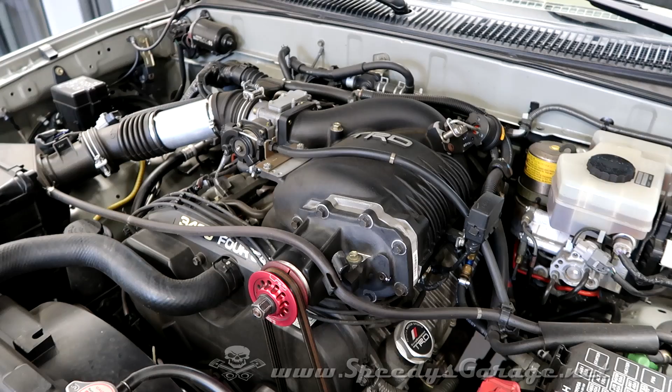Today at Speedy's Garage, we're going to love on Project 4Runner a little bit. It's been a while, so those of you new to my YouTube channel probably haven't seen the video where we installed the TRD supercharger. We did that about 10 years ago on this 2002 4Runner, and it really woke up the performance as you would expect.

It came with a 7 PSI pulley. We upgraded to the Underdog Racing Development 2.2 pulley, which took us to about 9 PSI of boost. And at the same time, we installed the Underdog Racing Development piggyback controller and 7th injector. This allowed me to tune the vehicle a little bit, remove some timing down low to prevent detonation, as well as add additional fuel through the 7th injector there in the back to give us a little bit more fueling and a little bit more power.

It's run great like this for almost 10 years, but I decided I would go ahead and try to up the horsepower a little bit, and we've got some tricks up our sleeve to do that. Also, what I've noticed when driving on the freeway, when you really start getting into the throttle, the first hard pull feels really strong. It's got a lot of power, a lot of torque, but if you get on it again after that, the heat is built up so much that you start to lose a little bit of timing.

I've got a scan gauge hooked up, and initial pulls will be 12 or 14 degrees of timing, and then the second pull will be 11 degrees, and it'll drop down to 9 or even 7 degrees at times, and you can really feel the power drop off in the vehicle. And the reason this happens is due to heat.

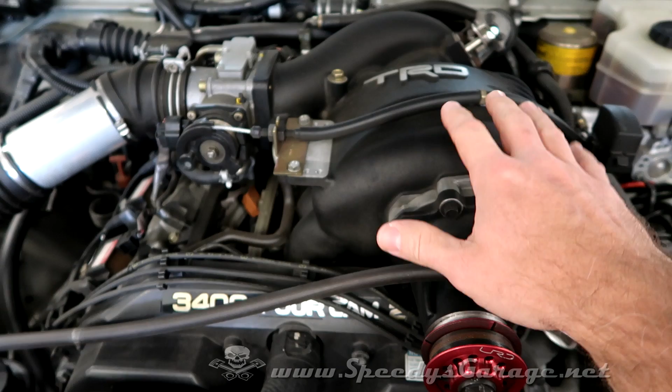The TRD supercharger for the 3.4 liter Toyota motor is a non-intercooled supercharger. What that means is the air comes into the supercharger, it's compressed in the supercharger and immediately pushed into the engine directly. There is no intercooler in between the supercharger and the engine cylinders. So the hot air from the supercharger, as it's compressed, goes straight into the cylinders. For those of you pretty familiar with superchargers and how they work, you can skip forward a little bit. For those that aren't, keep watching.

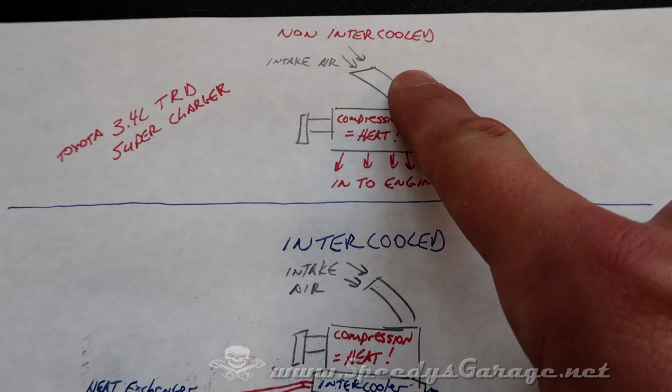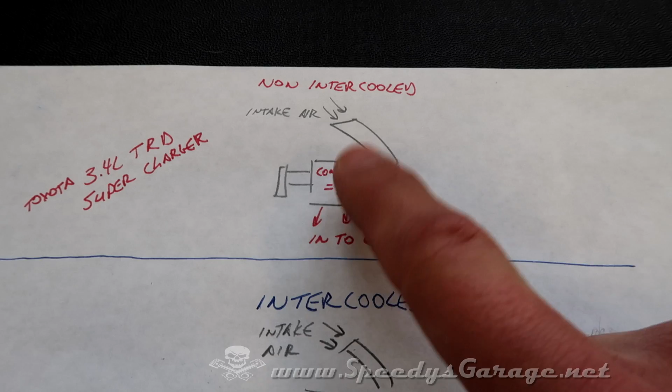The TRD supercharger on the 4Runner is what they call a non-intercooled supercharger. What that means is as the intake air comes into the supercharger, it is compressed, which generates quite a bit of heat, and the hot air goes straight into the engine. That's why the more you boost the engine, so you keep going wide open throttle over and over, it keeps boosting that air and heating it up. The hotter this gets, it just keeps getting the air hotter as well. It goes straight into the motor, the motor senses that change, you start getting some detonation, it starts pulling timing, as it should to protect the engine, but you lose power.

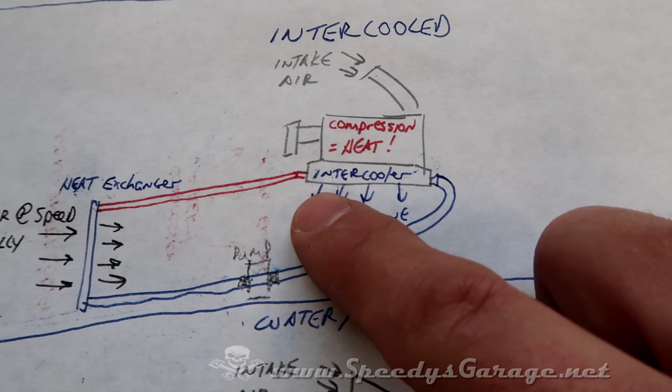More modern superchargers, or a lot of them, have what's called an intercooler and a heat exchanger. So you got the intake air coming in, it gets compressed in the supercharger and heated up just like a non-intercooled. However, you have this extra layer. It looks like a radiator, just a small thick radiator a lot of times. And as the air blows across it, there's a pump circulating coolant. So you've got coolant flowing around in a loop. It flows through the intercooler.

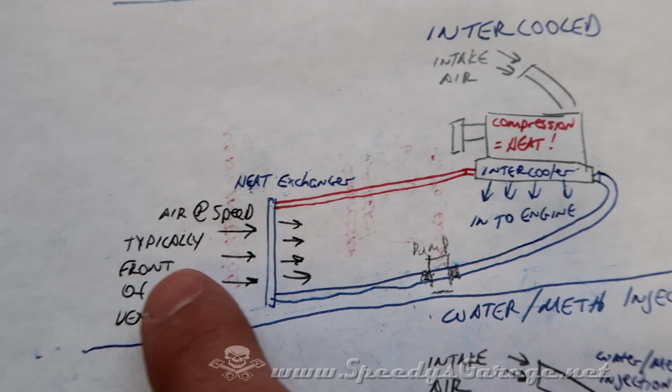It picks up the heat that has been generated by the supercharger. It takes that heat to the front of the vehicle where there's a heat exchanger. As you're driving, the faster you go, the faster the air blows across the heat exchanger. It cools this fluid, and the cool fluid flows back to the intercooler again to pick up even more heat. And it just makes a big loop like this, and so you get much cooler air going into the engine.

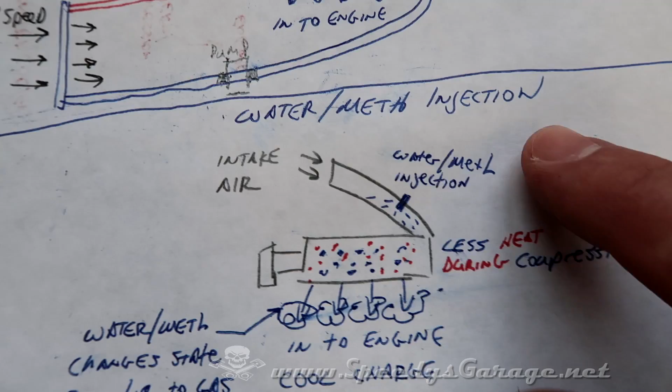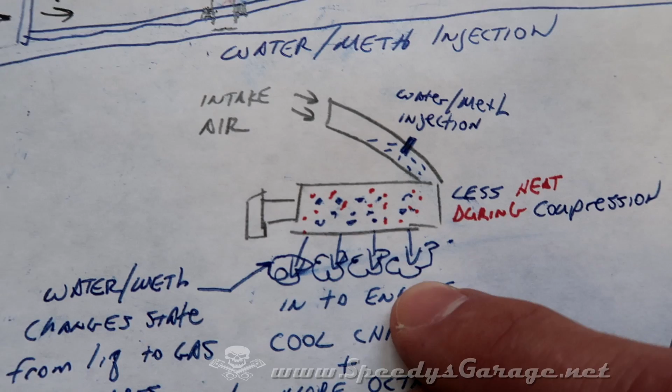The way water methanol injection works is in situations where you don't have an intercooler, intake air comes in, the injection nozzle is in the intake tube usually, a few inches from the throttle body. It sprays, the mixture goes into the supercharger, so you get a little cooling effect here. It goes into the cylinders, and this is where the magic really happens. The methanol actually has an octane rating of about 110 to 115. So you get a huge bump in your octane over 91 or 93 octane. So that's already good for the motor as is.

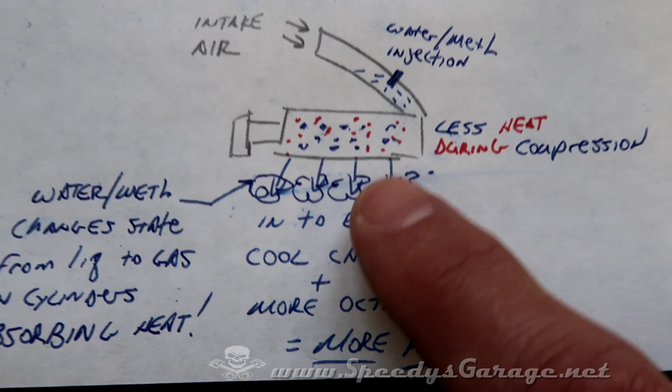But also, as the fluid enters the hot cylinders, it changes state. It goes from a liquid to a gas. And when that occurs, it absorbs the heat in the cylinders, so it cools your exhaust gas temperatures, I should say, and with the extra octane, the cooler intake coming in, plus the heat being pulled out from the fluid change, you get a whole lot more horsepower. So cool charge, more octane, more power, which is what we all want.

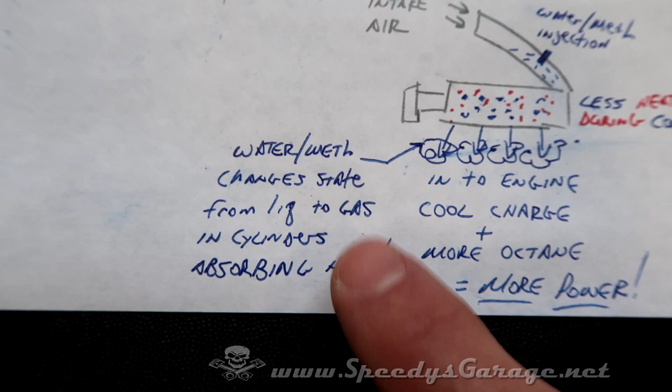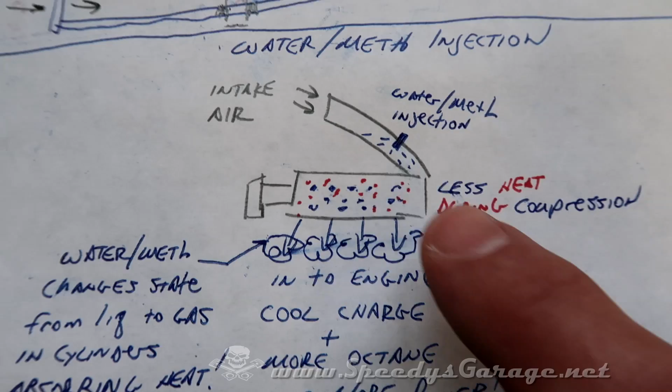Water meth comes in, changes state from liquid to gas in the cylinders, absorbing heat as I said. So that's why it's going to work so well on the TRD supercharger, because it basically replaces this whole system with just a chemical that sprays in the intake.

So to fix that, we've gone with a Cooling Mist stage 2 meth injection kit. Comes with the controller, and this is the reason I actually chose the Cooling Mist system. I like the way this controller is set up. It's got a min and a max knob, so you can set it up to what PSI it comes on, and then it'll progressively add meth injection to the max PSI, and then you're at 100% flow.

Comes with the tubing, the pump, comes with a couple of wires, some fittings. This stuff is junk, I won't even be using that. 4 screws to put the pump on the vehicle, which I'm gonna end up using my own hardware to mount.

Things that didn't come with it that I'm gonna add are the self-sealing tank tap. I actually got that from Devil's Own water meth injection. You drill a hole in the washer reservoir, which is what I intend to use, and then you tighten that down and it will seal the hole, and that's how you'll get your fluid.

I'm planning to run the standard winter washer fluid. Some people say not to use that because of the detergents, but I've read that as long as you shake it up and the bubbles go away immediately, that it's fine. So I'm gonna try it and see how we do.

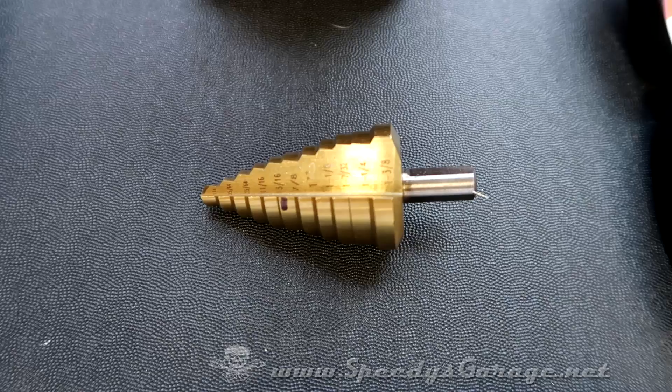Obviously I'm gonna add some wire loom. I like my wire colors to always match up, so I added the necessary wire colors that I would need, as well as some bolts to mount the solenoid that came with the Cooling Mist kit. Tools are gonna be pretty standard stuff. The only unique one that I'm gonna need is this step bit, and that's to make the hole in the washer reservoir. You need a 7/8 bit to make that happen.

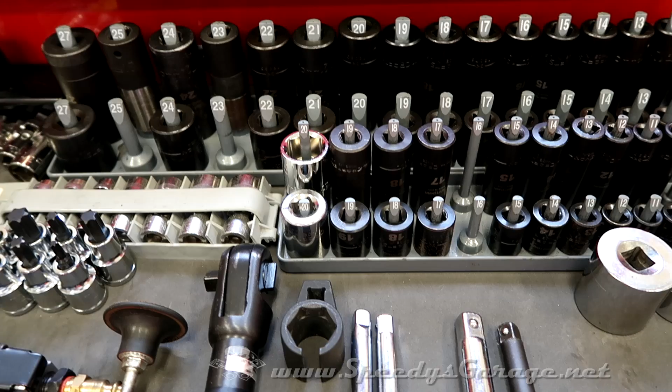Obviously gonna use power tools wherever I can to save time. You're gonna need standard stuff for all the electrical, from heat shrink, wire stripper, electrical tape, solder, and soldering iron. And you're also gonna need a good assortment of sockets and wrenches, and maybe some interior trim tools as well.

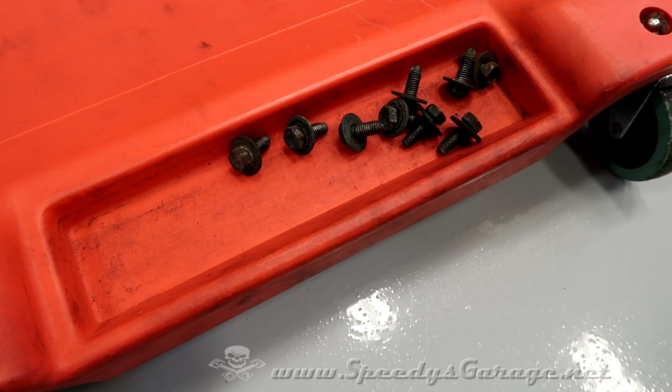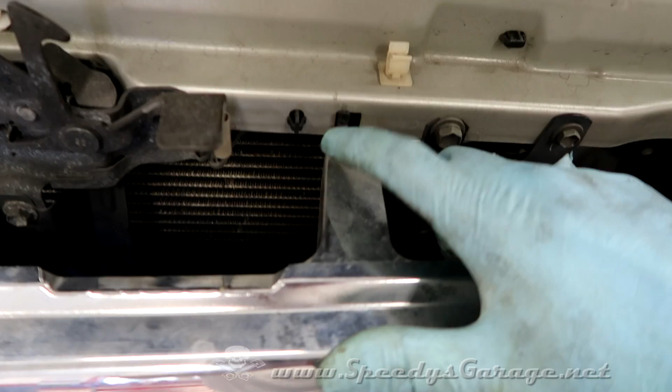To get an idea where I'm gonna mount the pump, I've started by removing the splash shields, and those are just held on with 9 12mm bolts. Next, I'm gonna remove the front grille, and it's just these little plastic tabs you push down on with a screwdriver and you release all of them. Mine's a custom grille that I built, so yours might be different, but bottom line, just go ahead and get that out of the way.

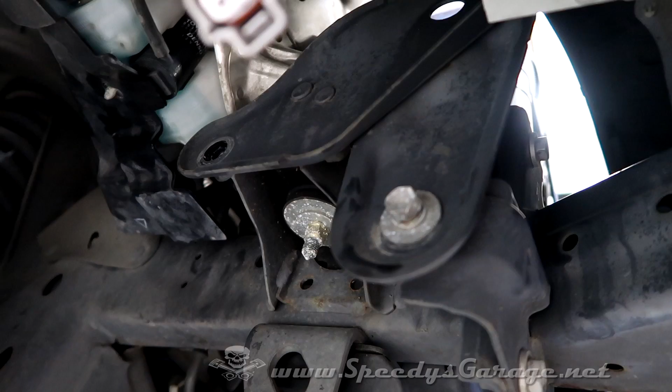Next, we're gonna remove the front bumper, and it's a couple of 14mm bolts on each side, and a couple of 12mm bolts for the plastic shroud on the front. And be sure you disconnect your fog lights and your front turn signal if you have fog lights in the bumper.

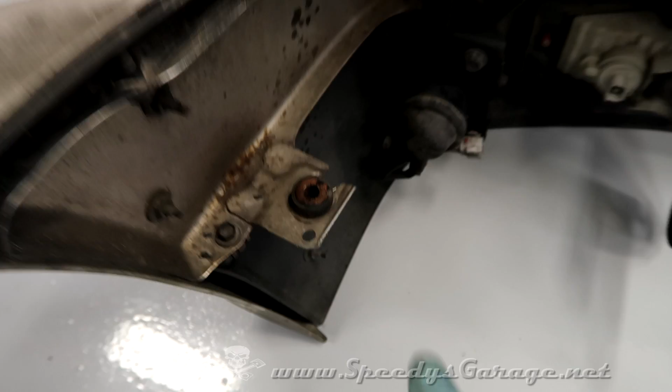The final piece of the puzzle to get the front bumper cover off is this stud right here. It's got a 12mm flat washer nut on it, and they go through these grommets on each side. Once you remove that nut, you just have to wiggle the bumper off, and it takes a little bit of muscle.

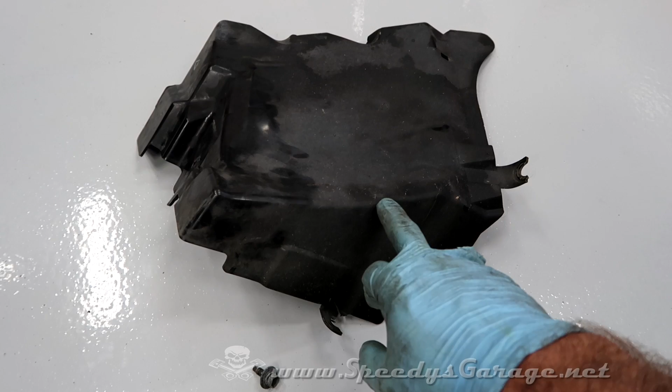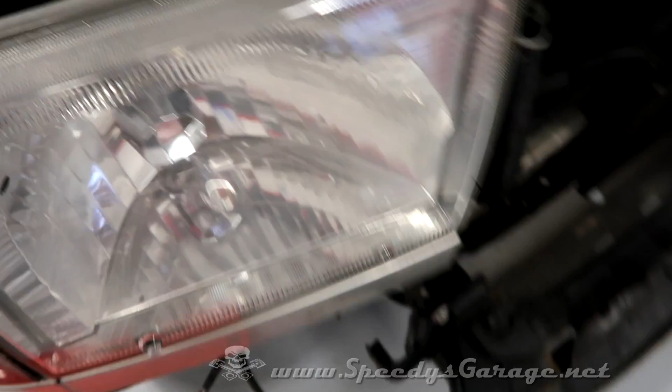Next, I remove the plastic guard over the washer bottle, and it comes out through the passenger side wheel well. There's 2 10mm bolts, one on the top, one on the side, and mine were in pretty rough shape. And then there's a couple of hooks where it actually hooks onto the washer bottle itself. So there's the 2 bolts. Then you come up top and you pop the neck loose, and it pops loose from this tab. And then it wiggles out, and we should be able to get the washer bottle out through the bottom.

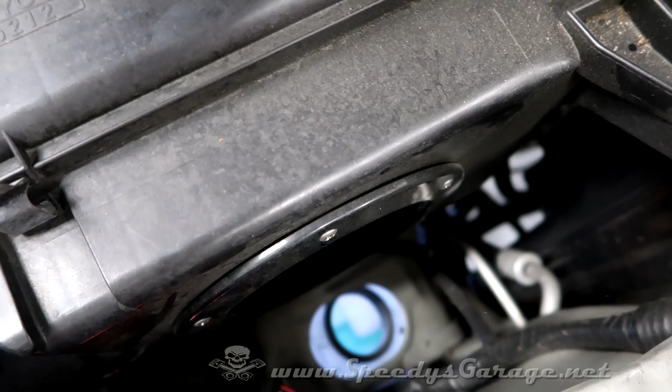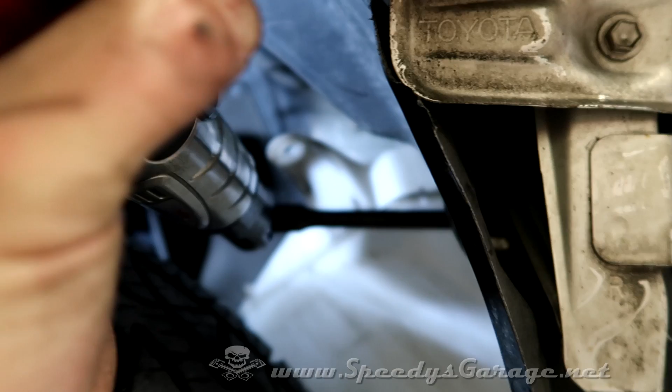I found one more 10mm bolt on the front towards the bumper. We'll need to remove that. Next, disconnect the front and back supply tubes, and finally, your electrical connections to your motors, and then it will come free. This larger 4-connection connector is the one you want to release, and then that tab right there goes to the connector that's actually on the bottle, and then the whole reservoir will come off.

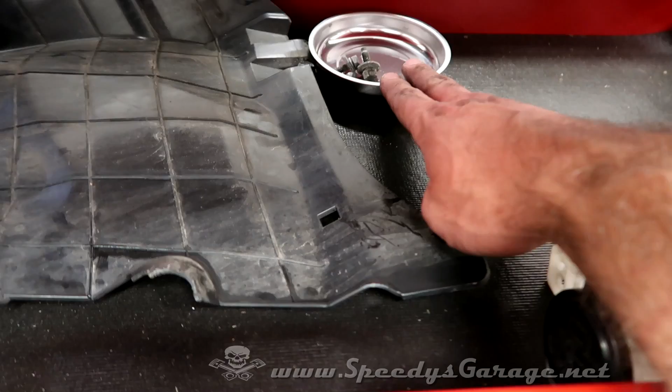Okay, we're starting to get a few parts off the car now, so you want to start organizing your bolts with the parts they go to, so you'll know what went where when you put it back together.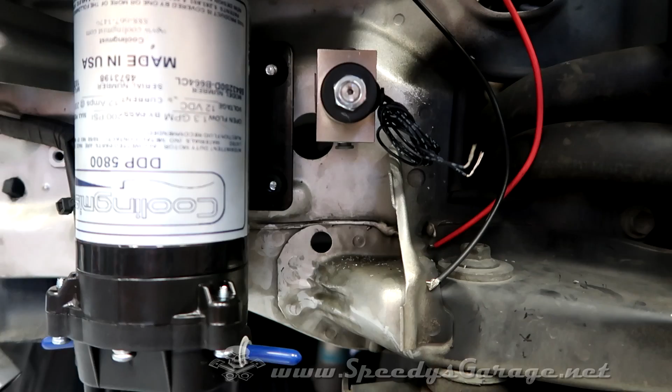To mount the solenoid, there are 2 threaded ports on the back of this one. And I think I said they were 8-32, and I used 1/2-inch little Phillips head screws, and I picked up some aluminum spacers to space it away from the body of the truck to get it a little bit more in line with the output of the pump. That should make routing the line a little nicer, and it won't rub against the body. It's the little details that make things last. That's why I always do stuff like that.

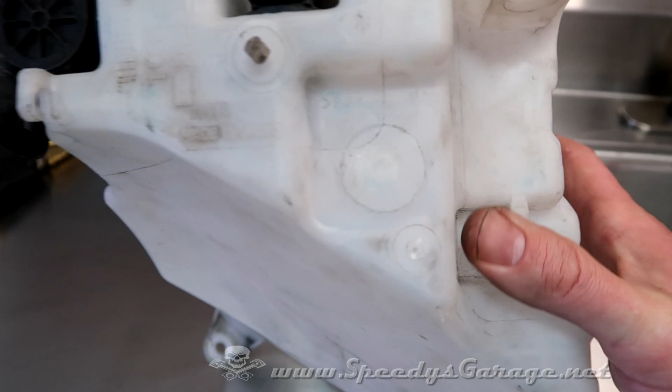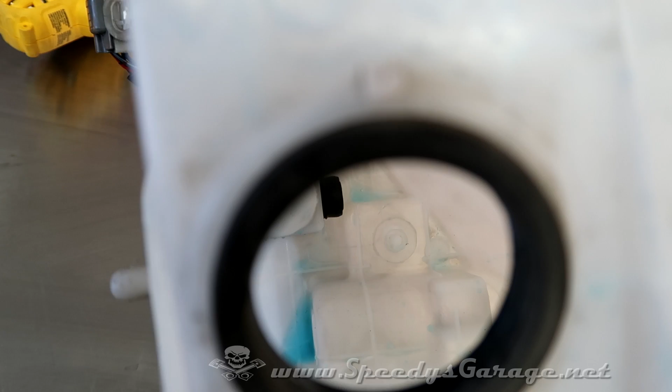Next, I've located a spot to mount the Devil's Own self-healing tank tap. Like I said, this is one of those that as you tighten it down, the rubber expands, creating the seal. And looking at the very bottom of the tank, there's a spot right there that looks like it was almost made for that tank tap. And looking inside the tank, you can see that that spot's nice and smooth. So what you want is a nice smooth area that's flat to mount that tank tap, since it's at the very bottom of the tank. The fluid will just exit, come straight out and towards the pump.

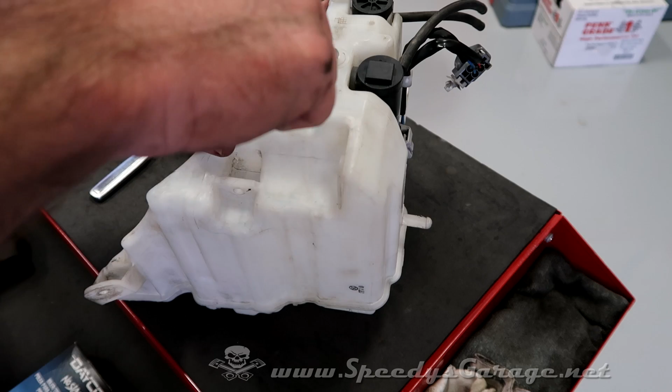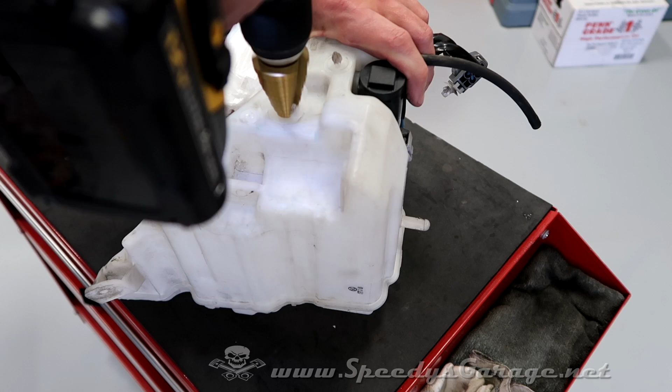Should work great. I'm going to use my center punch to mark a start hole. Now we're just going to drill it out. So that step bit does a nice job of making a perfect circle. Nice and clean. I did go in with some 400 grit sandpaper and just smooth that edge so it wasn't sharp. And now our tank tap, we'll just drop in and we'll finger tighten it. And again, if you use the same tank tap that I used, that's a 7/8 hole. That's the size you're going to need.

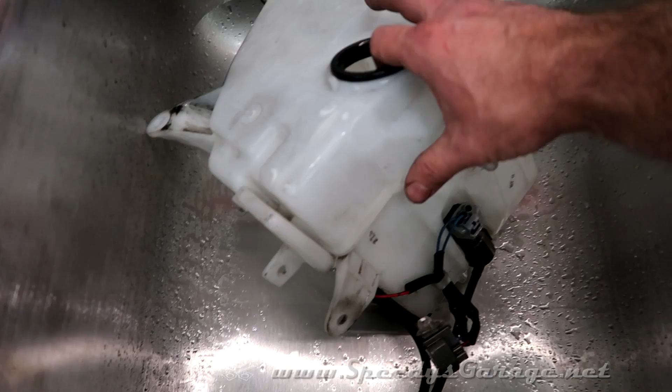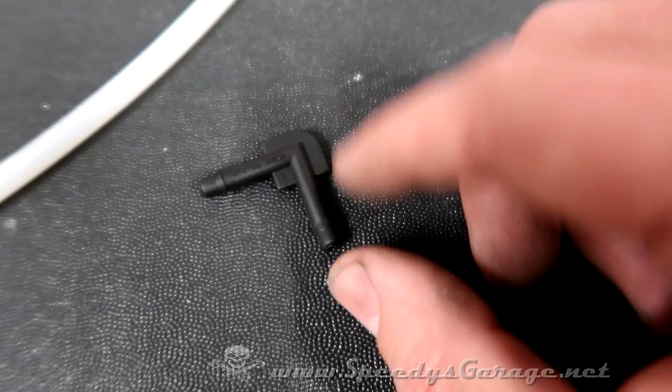Next, I filled it up with water to test for leaks. All it took was finger tight to seal it up. To get the lines to route nicely, I went and picked up some 90-degree elbows. I wasn't able to find the exact size that I need. These are 3/16, and I believe I need an 1/8 size. So what I did is just took one and modified it. I cut the barb off of it because it wouldn't slide over that barb, or I was afraid if it did, it would split the line. So I just cut the barb off, and that's super tight. There's no way that's ever coming out.

And that's going to help me route the lines a little more cleanly coming out of the reservoir and over to the solenoid. And if you want to do something like I did, there's the part number for the pack that I found. There's 2 of those small 90-degree elbows in this pack. So depending on how many you need, but 47355 is the part number. Or you can just try to order some 1/8" barbs off of the internet somewhere. I didn't have time to wait, so I just made my own.

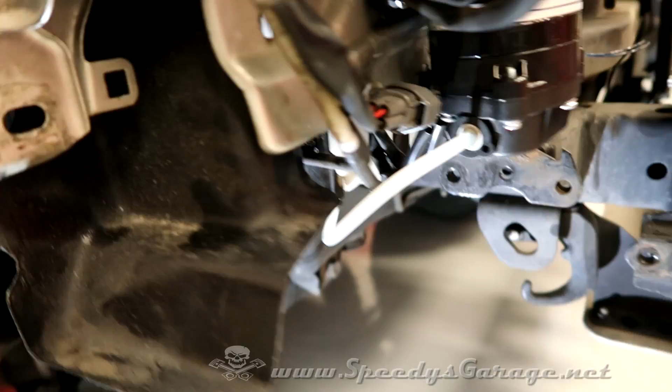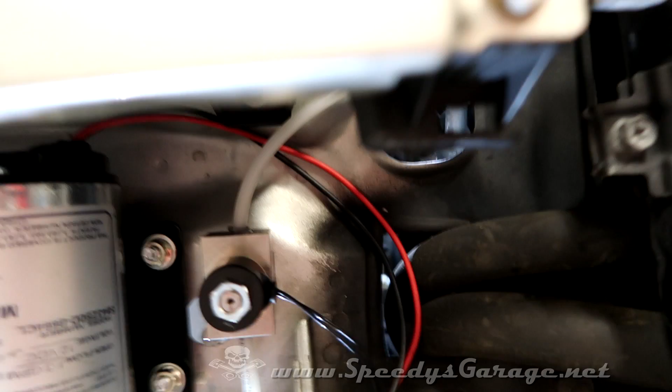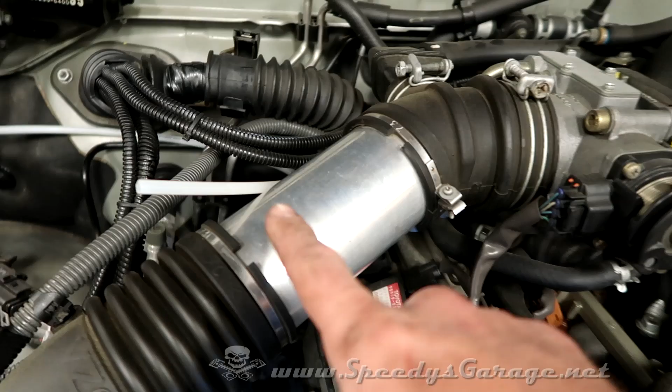So I've mocked up my lines to see how they're going to run. There's my elbow I talked about earlier, coming out of the tank tap. Comes around to the front, connects to the pump, out of the pump, up to the solenoid, and over, you can see that, and around into the engine bay. From there, I route it under the air box and along the wall of the fender and around to the intake tube where the nozzle will be located. And obviously this is just mock-up. I will put wire loom over that to protect it and to hide it and make it all pretty.

I also filled the tank up about 1/4 of the way with water to check for any leaks. I've let it set for about a half hour and not a drop. I did make sure I've got some in the tube, so I know we're good to go there. So everything's turning out nice so far.

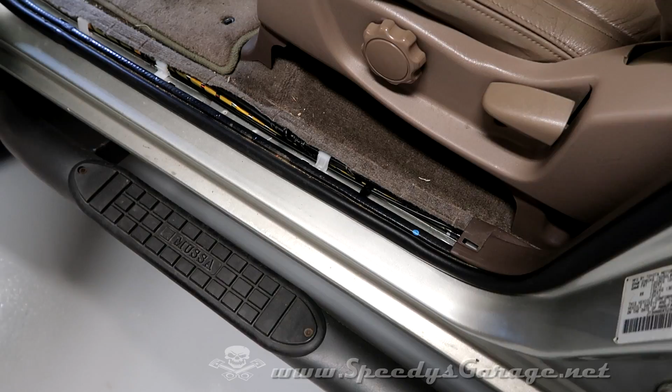So as I mentioned, I use a Circuit Boss for my aftermarket accessories. So I've removed the floor trim as well as the kick panel so I can get access to it. And basically it's an add-on fuse block. It has switched 12-volt power, a relay, and then that powers 3 additional circuits, and they're kept independent from the car's wiring. So all of my accessories run through that. And I've got one circuit available that I'm going to use for the meth injection.

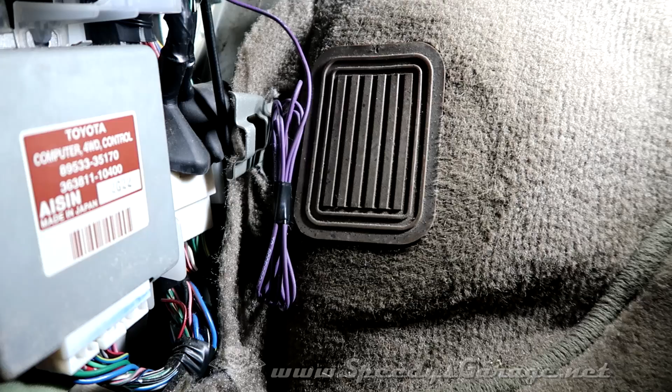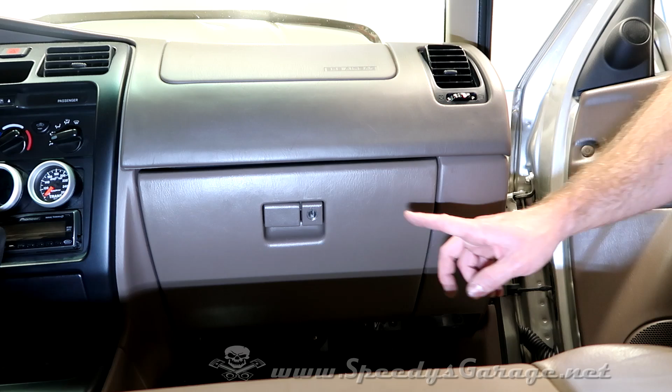Now I'm going to prep to run my wiring through that large grommet. This isn't the only way to do it, this is just how I do it. You can actually drill a fresh hole if you wanted to, or go through some other grommet in the firewall. I found that one to be pretty accessible from the inside of the vehicle. And I've obviously run a lot of stuff through it, so it's a little tight, but these wires won't be too much additional. And I'm going to use a coat hanger or some long rod to feed the wire through. Next, I'm going to remove the glove box to give me access to that wire as it comes through. And that's just a couple of Phillips head screws on the very bottom.

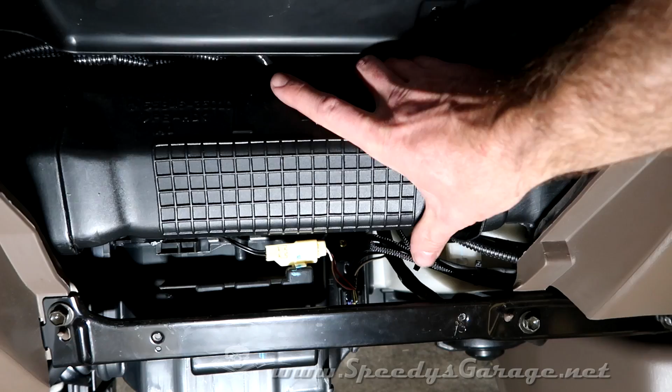And then the glove box will just lift out. Next, I'm going to remove the AC duct. It's really easy. Push it to the driver's side. It'll pop out. Now we can get access to the wiring. I think that'll be good enough for me to get the wires in. We will have to take some parts of the dash out to get to the gauges.

Next, on a 4-wheel drive 4Runner, loosen this Phillips head screw for the 4-wheel drive knob. You don't have to take it all the way out, just loosen it so that it'll slide off the stick. Then you just gently pry up on the bezel. And I went ahead and removed the shifter lockout so that I could put it in different positions. And then just lift that up.

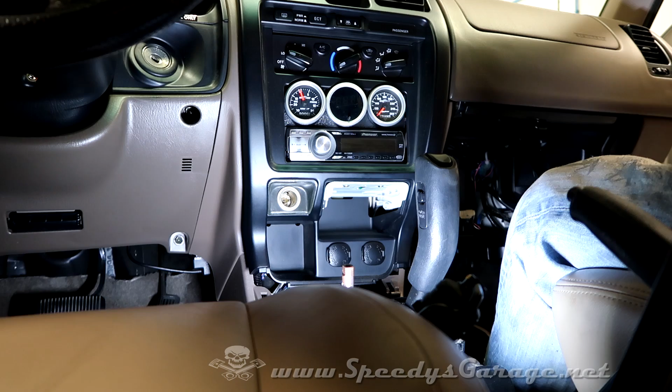And then the 4-wheel drive shift button has a connector down here that you need to disconnect. And then we're going to work on this. For the center console, there's really not a whole lot to it. Make sure you got the shifter back all the way, and it's just tabs. You just pop loose, and then a whole bunch of plugs. There's a hazard plug, there's plugs for these. These have to be disconnected, the ashtray light, and the cigarette lighter.

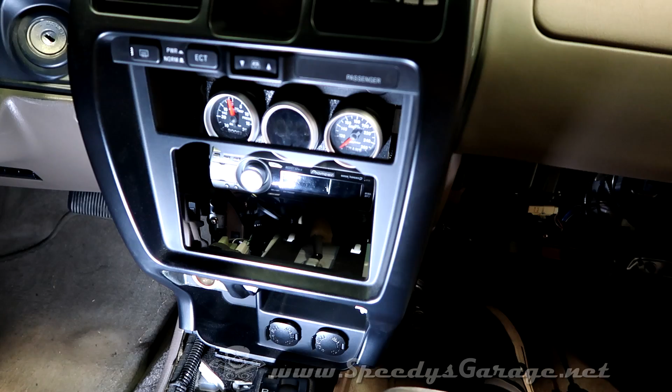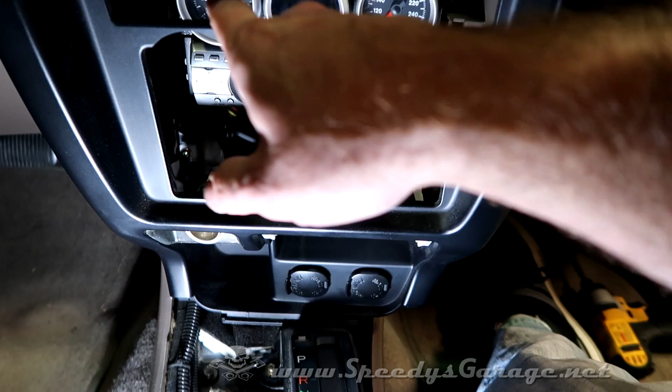And this of course assumes you're going to mount your boost gauge or your water meth controller where my boost gauge is now. You can always mount it over there in the corner or somewhere else in the vehicle. A lot of people put them down here in this opening, but I've built a custom panel. If you haven't seen that, it's on my website, speedysgarage.net, to hold all of my gauges. So I'm just going to replace my boost gauge with the controller. And when you get the bezel removed, that's what you're left with.

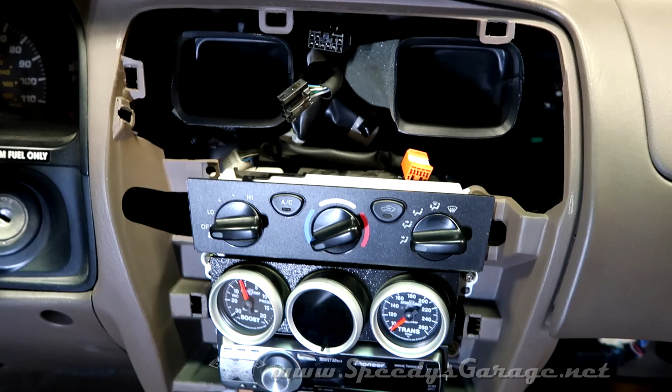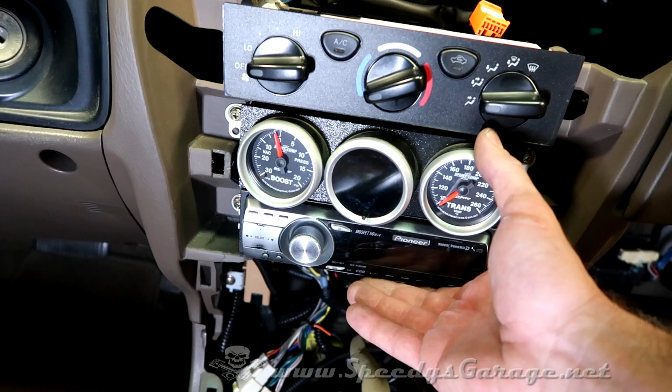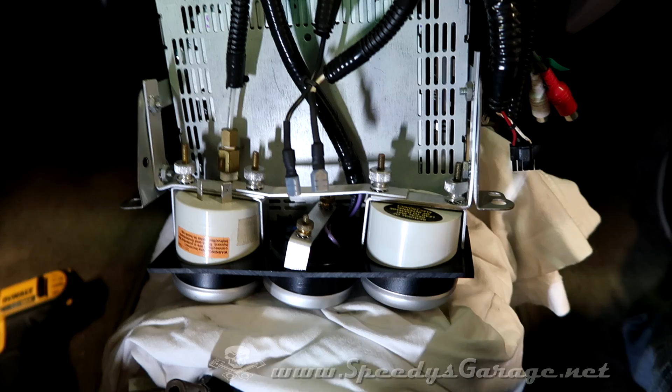And this is the same procedure, by the way, if you're going to upgrade your stereo. Same exact thing. Next, I'm going to have to take these 4 screws out to take out my custom cluster that I built with the stereo integrated. Back in the day when I built this custom gauge bracket, I used butt connectors or spade connectors so that I could make it serviceable. I could disconnect everything if I needed to. The only thing I have left is the boost gauge. I need to disconnect the actual vacuum line, and this is what will feed our meth controller.

If I were building this today, I probably would do a nice Molex connector for all of these. So I've got several connections, the wideband, dimmer for the gauges, as well as power and ground for the gauges and things like that. I'd probably just do a giant Molex connector so it was one big connector that snaps together. I've learned about that since I built this 10 years ago, and it's basically pins that you solder to the wires and then they snap into a plastic Molex and they just snap together. It's really nice and OEM looking.

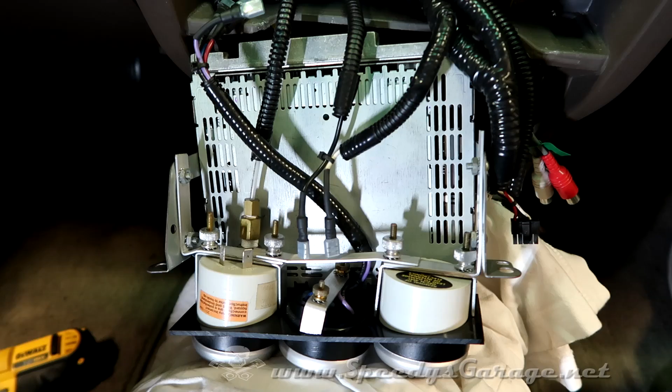So I ran into just a little bit of a wrinkle. I built a custom gauge pack to mount my gauges on top of my stereo, and the water methanol controller and boost gauge is a different size than the Auto Meter boost gauge I had been using before. So that means I'm going to have to make some adjustments to these brackets.

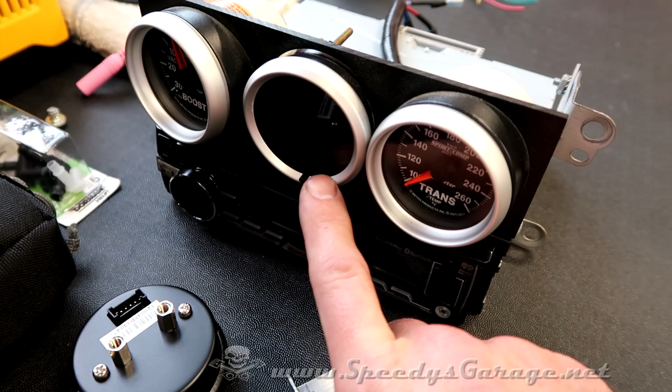Also, I had a Nordskog gauge to read wideband from my Innovate LC1 wideband controller, and it's been on the fritz. It would freeze up and I'd have to tap it to make it start reading again. So while I had everything apart, I decided to replace it with an Innovate DB gauge, I think is what they call this. And I'm running into the same issue there. The back is actually totally different, as you can see. This one had studs, this one doesn't. So I'm gonna have to make new brackets to make all of that work.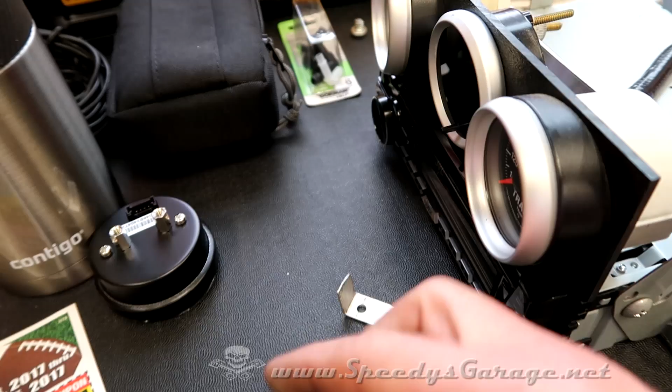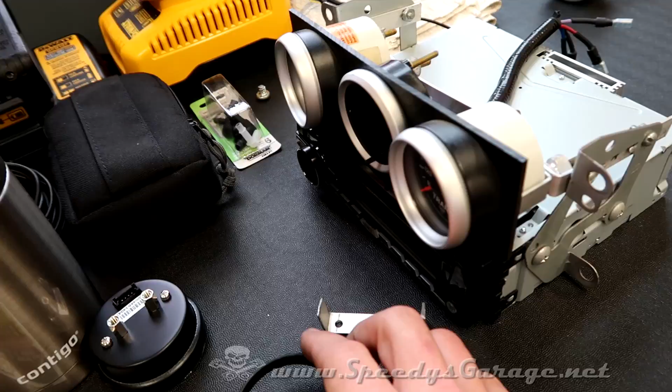And I don't know if you've seen these before, but I actually made little trim rings, and these are made from 2-inch conduit, if I remember correctly. And I cut them at 10-degree angles so that they would make the gauges face towards the driver. So I have to take the angle into account too. So it's gonna take a few minutes to fix, but nothing I can't get done with a little bit of 1/2-inch aluminum bar stock. So I'll be back in a few minutes. And when you're working on cars, especially anything custom made, you've got to be ready for this kind of stuff and just roll with the punches and make it all work. So no big deal.

So this is what I came up with. If you're asking if I upgraded the stereo at the same time, yes I did. One of them with Bluetooth and Pandora and some of the other features. So I went ahead and swapped out the stereo for the new one, but that doesn't change what I had to do. The brackets and everything are still exactly the same.

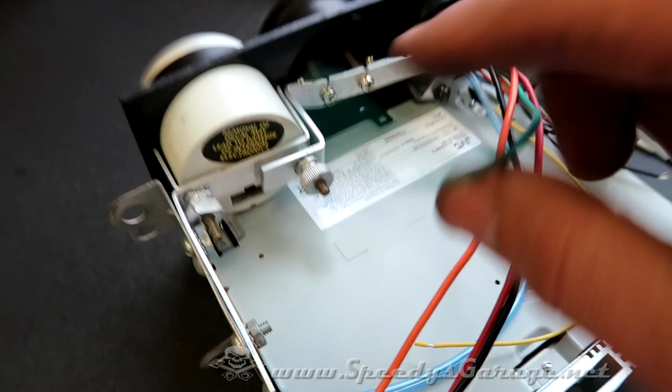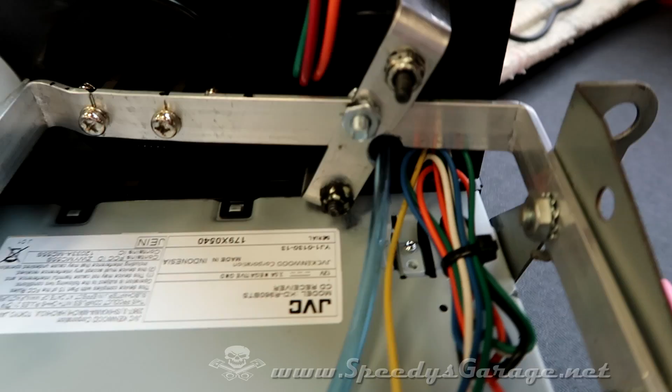What I did have to change was this bracket across the back. I actually simplified it some, so now that's just 2 pieces. This one runs out, down, and all the way over. And you can see how I routed it. I had the clearance for the boost tube right here. No big deal, a little bit of Dremel work.

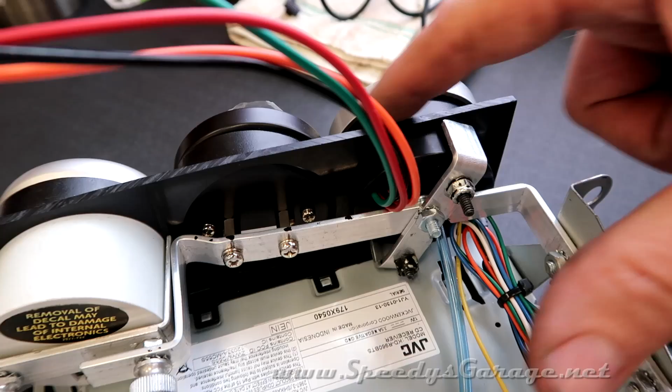Really not technically difficult, just a lot of measuring, rechecking, because this is all real intricate fitting pieces. So you have to make sure that they look nice and even, equidistant, and all that kind of stuff. But that's how I got it done. Now we can get back to installing the kit.

One thing I gotta mention, the cooling mist controller did not come with any bracketry or hardware. I went and searched the box. I was kind of surprised at that. So I had to make a bracket, which wasn't a big deal. I probably would have had to make one anyway.

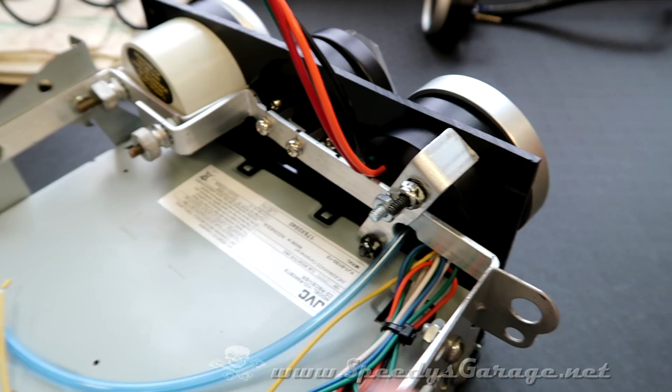But then I had to search through my bucket of spare bolts just to find these little lock nuts to go on the back. So keep that in mind if you're buying this kit. You want to go ahead and get your hardware to save you some time when you're installing it.

Next, I'm going to go ahead and put the wires that need to run to the interior together. I measured off plenty of length to reach, and I'm putting them in this fabric loom. I like to use this stuff. It makes the wiring a lot nicer, protects it, makes it look OEM.

And to put it on, you just inch it. So once you get it started, you just slide a little bit and pull a little bit. And eventually, your wires pop out the other end. That's what you end up with. I put some electrical tape over the end and I loop the wire over and put it on a cut-off clothes hanger. We're going to use that to feed the wire through our grommet back there.

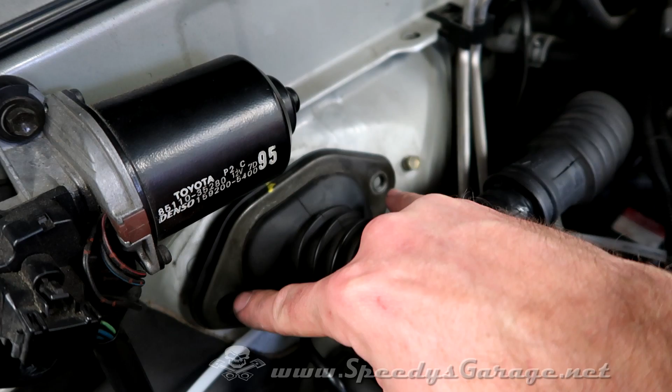And if it gives you any trouble, just remove the little bracket on the right side. It's a 10mm bolt here. I stuck it back in so I didn't lose it. There's two 10mm bolts here, and then you can pull it off the firewall to get some assistance putting that wire through. Mine's pretty packed full of other stuff, so mine was pretty tricky.

Now we can put that back on. We've got the wire run to the inside. And don't forget to finish it off with a little bit of heat shrink to make it look professional. Okay, I've installed loom on the injection tube, and in the engine bay I use the high temp stuff. You know it's high temp because it has a gray stripe on it. And this is a quarter inch loom, and it fit the tubing perfectly.

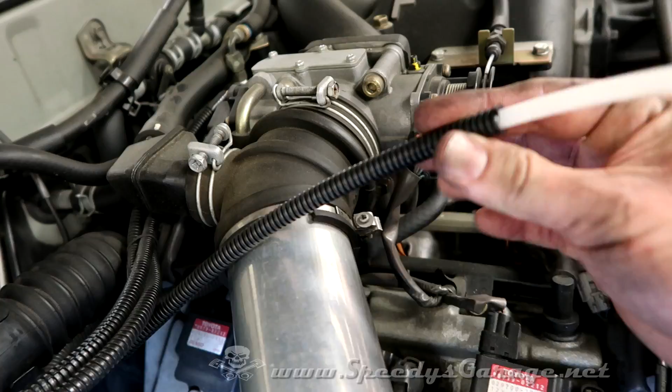Ran it all the way around, like I said, routed it down out the front of the car into the solenoid. I got the pump hooked up as well as the elbow to the washer reservoir.

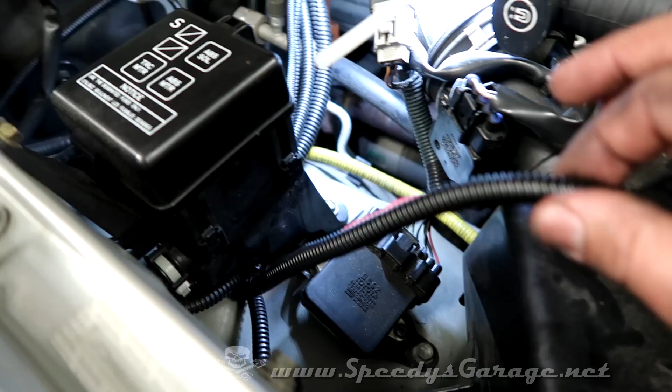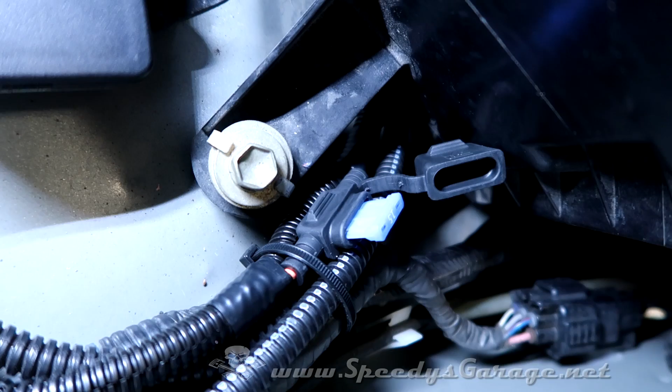I also finished off the loom, so it runs here like I showed you before, and then where the fiber loom stops, I started with the corrugated stuff, and I have soldered in the 15 amp fuse that goes to the power side of the pump itself. So that's soldered into the red wire that will run back to the cooling mist controller. Then I zip tied it to keep it secure and serviceable if I ever need to change the fuse.

I put the fuse in. And this one has a waterproof cap that goes over it like that. Much better than the one that came with the kit. I don't recommend those splice-in design fuse holders. They're crap. Don't use them.

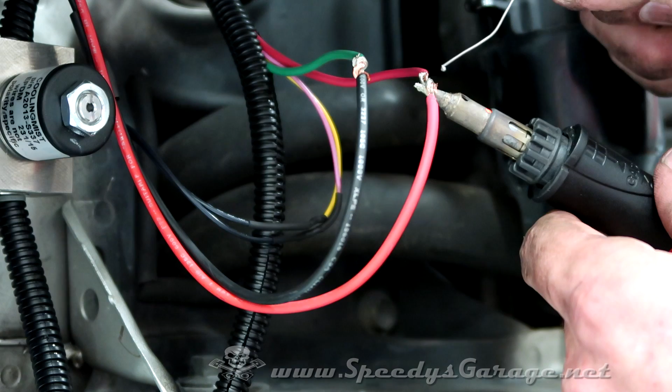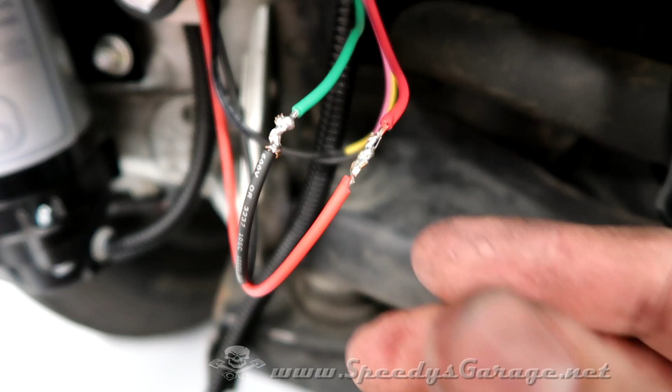So when soldering, always use proper solder technique, and that is to heat the wire, not the solder. When the wire is hot enough, it should draw the solder into the wire. So you can see how it's drawing the solder into the wire, almost like it's just painting it. That's what you want. And that's what you end up with, a properly soldered joint. Now we're going to put our heat shrink on and get it all protected by loom.

A lot of people are probably tempted to use butt connectors on something like that. If you have to, at least use the weatherproof ones where you put them on and then you heat up the ends and they shrink together. But on something like this, you want a very solid connection, and when you solder something, it basically just becomes one piece of wire. So I recommend soldering it and not using any type of butt connector. Just like that, nice and tidy.